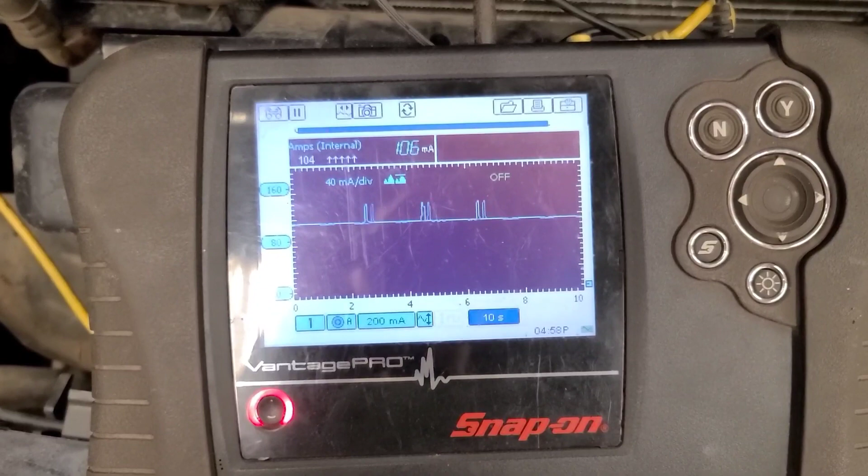So it's the next day. We're back working on this 2012 F150 for a parasitic draw. In the previous video, I found a broken wire between the door and the pillar, keeping the interior lights on, but that shouldn't have killed the battery because the BCM should shut down the interior lights after 15 minutes. Then the draw dropped about 2.5 amps. I found the two sun visor mirror lights on because of broken or worn hinges. And then it still dropped down to about 2.2 amps.

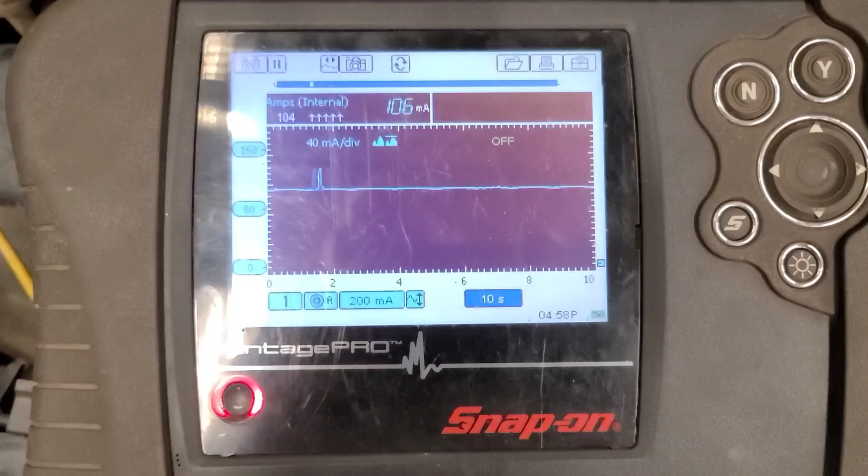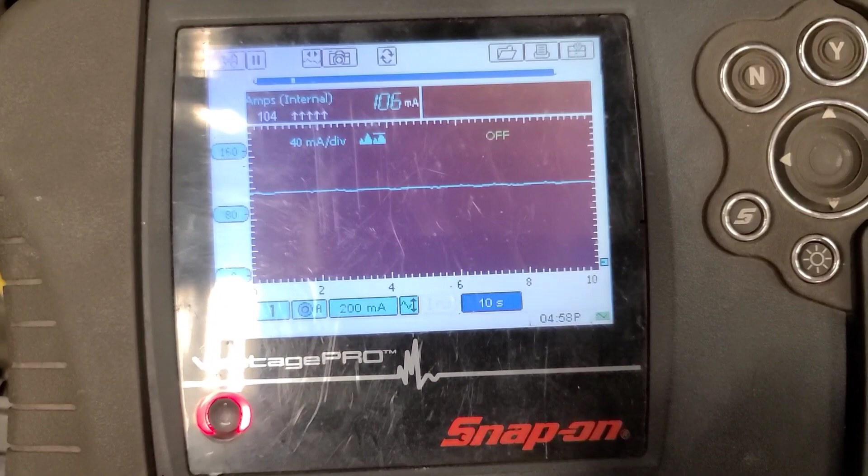And then I was playing with it, pulling fuses, and it dropped to 106 milliamps, and it's been 106 milliamps. But you can see over the course of the night, because it's been recording since yesterday at 8 p.m., the current draw exceeded 200 milliamps, because that's what the arrows indicate. 104 minimum and maximum overload.

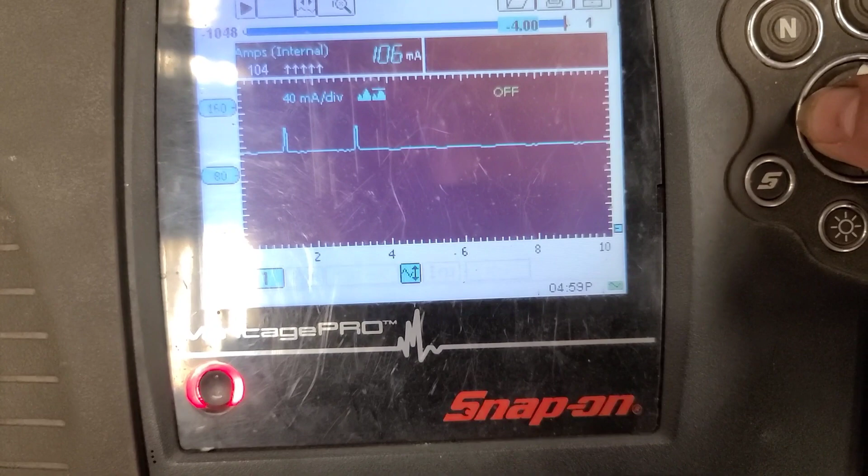Now, I don't think this recording would have caught anything. I'll back up in the recording and look. So we're looking at the record on this thing, and I was doing some research last night.

I noticed that one of the codes that I kind of passed over on the initial scan yesterday was this B1277-15, reverse lamp circuit short to battery or open. I thought, well, maybe it has a bad bulb or something back there.

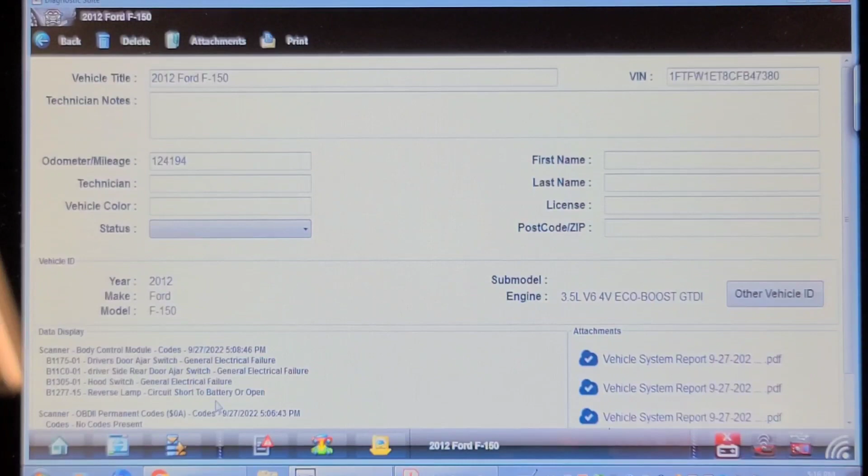I went on Identifix and I did a keyword search for battery drain, and I come across a couple of cases. Where is it here? Okay, battery drain.

Connector 405. Vehicle has a battery drain that will deplete the battery overnight, such that the engine will not crank. The PRNDL is showing proper transmission, shift lever in all ranges, including park. Connect the DVM to fuse 53 at the battery junction, and then remove fuse 34 of the body control module to determine if the voltage on fuse 53 drops.

So I'm going to do this. The bottom line is corrosion in connector 405. Clean connector 405, which is at the back of the truck, causes a bleed of voltage from one of the electrical circuits in there, and of course the BCM controls all the tail lights, including the backup lights, and somehow that bleeding voltage bleeds from a hot-at-all-times circuit to the violet-brown wire.

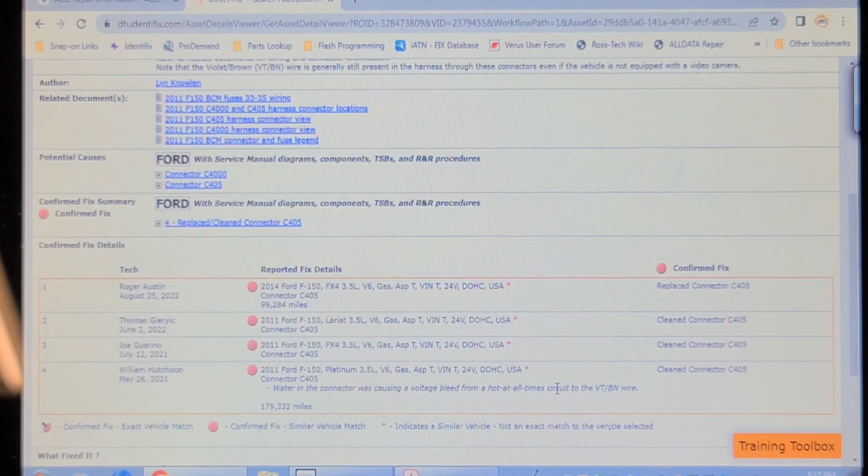So I'm going to look at this circuit and try and establish whether that's a problem. We're going to look at connector 405, which is right by the rear bumper, and considering this thing is in northern Ontario where we have lots of salt and corrosion, there's a very plausible possibility here.

So we're looking under the back of the truck. That's connector 405 that you see there up on top of the frame rail cross member beside the left side of the spare tire at the very back. And it's clipped to the body of the truck. But I think I'm going to try a couple of electrical tests before I go and try and pull that connector apart.

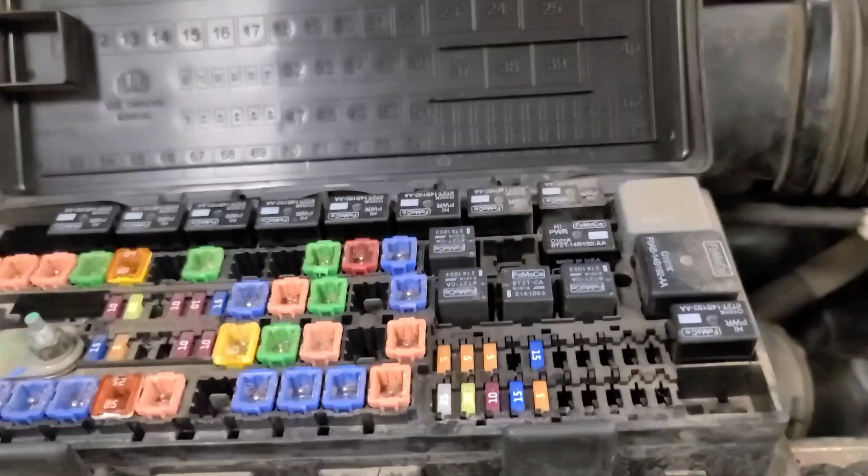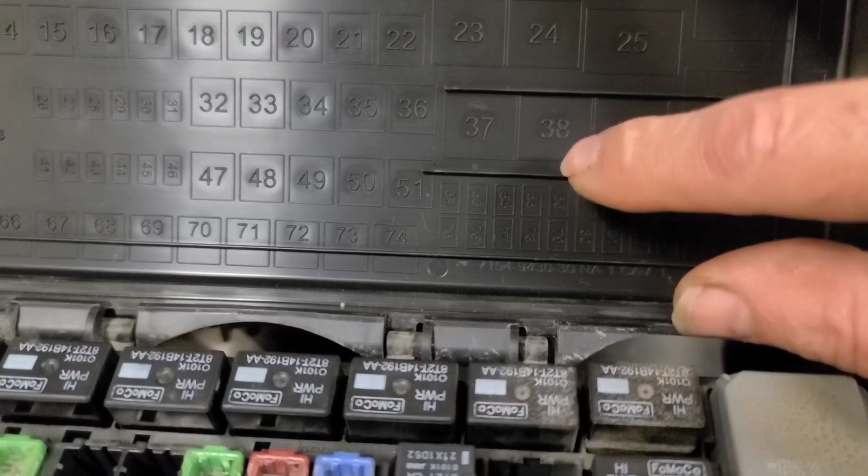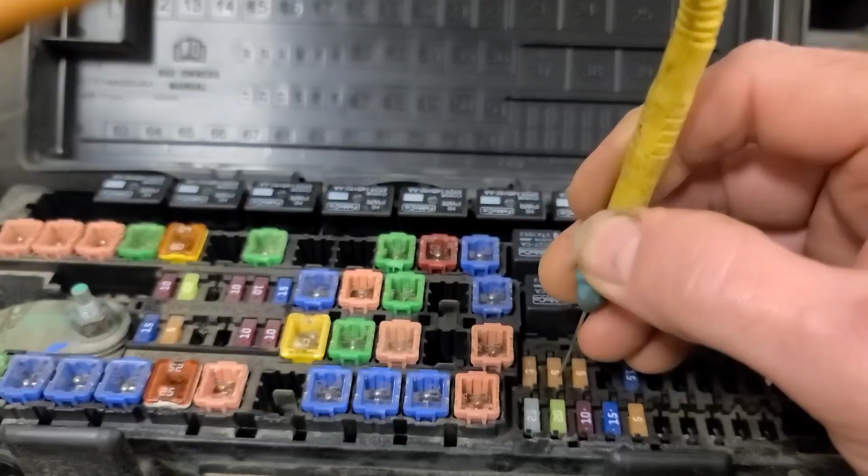So the technician instructions say, before extensive testing is performed, connect the DVOM to fuse 53 of the BJB, which is the battery junction box right here. Fuse 53 is this one right here, 52-53. So that is this second 5 amp fuse right here. And I'm reading 3.143 volts on it.

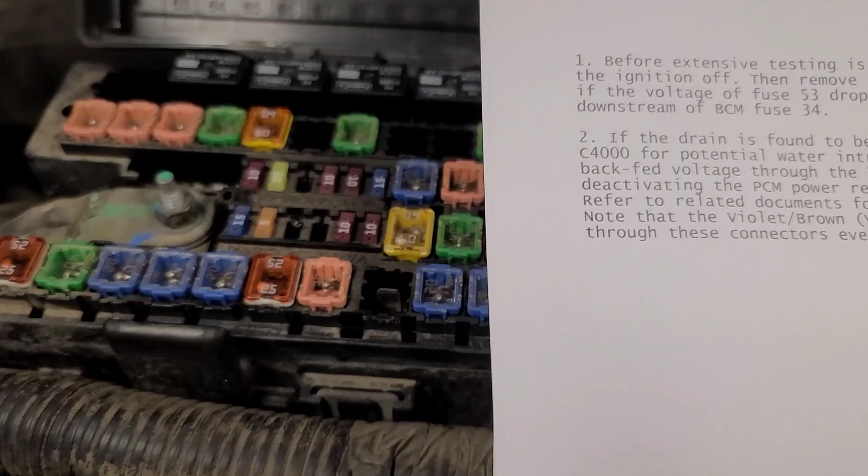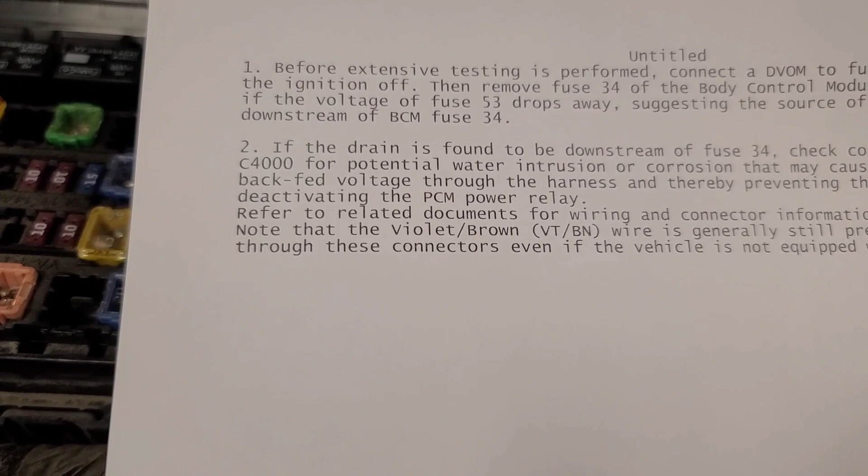So it says, with the ignition off, which it is, removing fuse 34 of the body control module determines if the voltage on fuse 53 drops away, suggesting the source of the drain is downstream of fuse 54 or 34. So let's remove fuse 34 from the BCM.

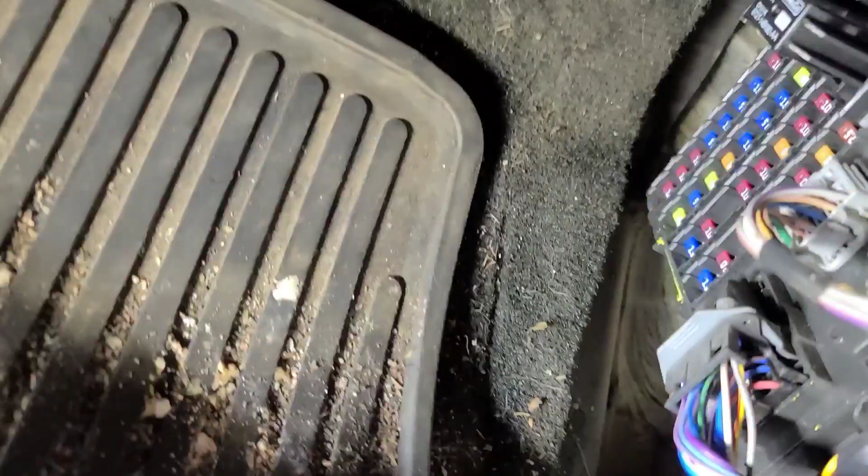So fuse 34 on the smart junction box, or the BCM, is this one right here. So it's 1, 2, 3, 4, 5, 6 up from the bottom. Is that fuse even live? I hope I'm on the right fuse. I don't think that fuse is even live.

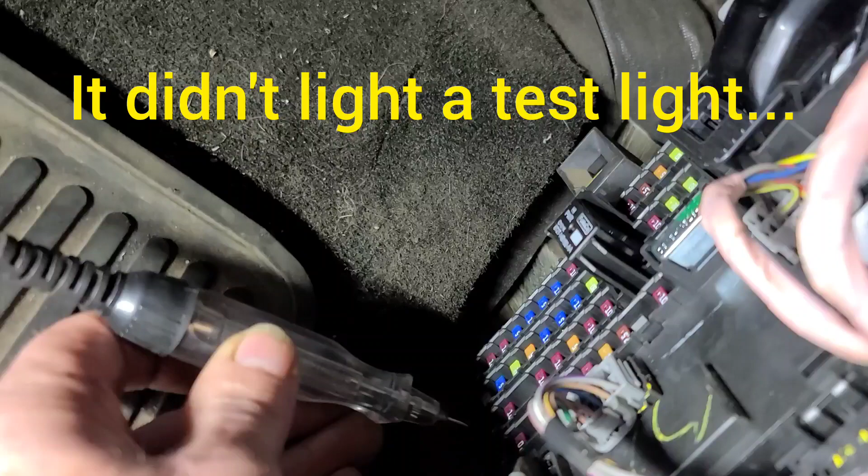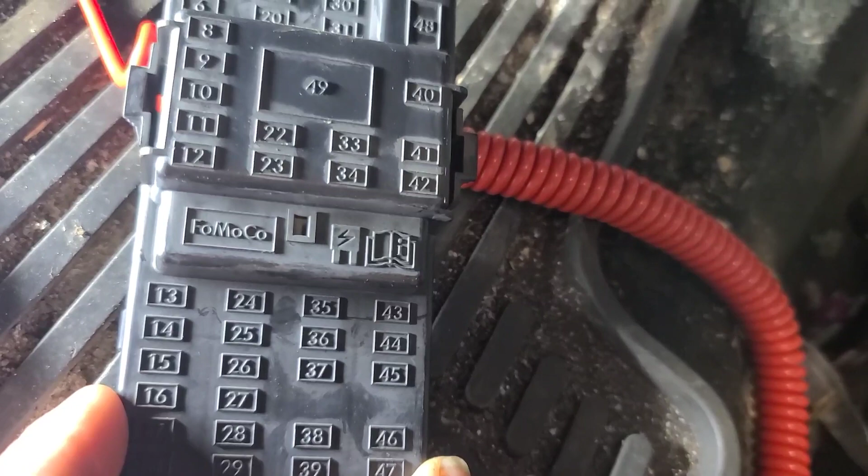That one is. So 1, 2, 3, 4, 5, 6. Let's double check that. One, 2, 3, 4, 5, 6. The second row. They're not numbered on the junction box, but that fuse is not even live.

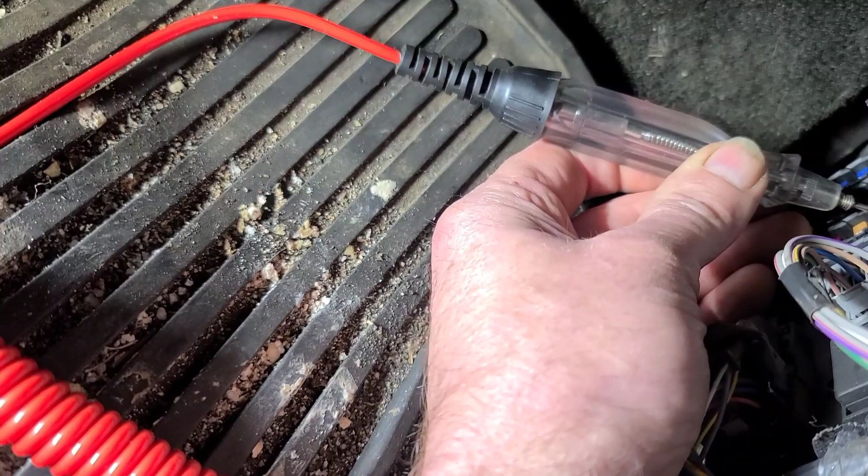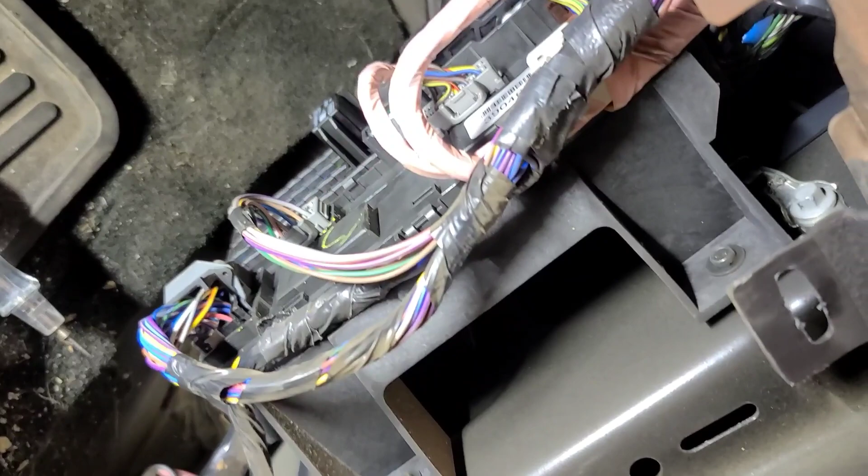But that doesn't mean there's no voltage there. It doesn't light a test light. 1, 2, 3, 4, 5, 6. So that's the second 10 amp fuse. I need a pair of needle nose pliers. So there's the fuse out of that location. Let's go check and see if we still have voltage on that wire, or on that fuse.

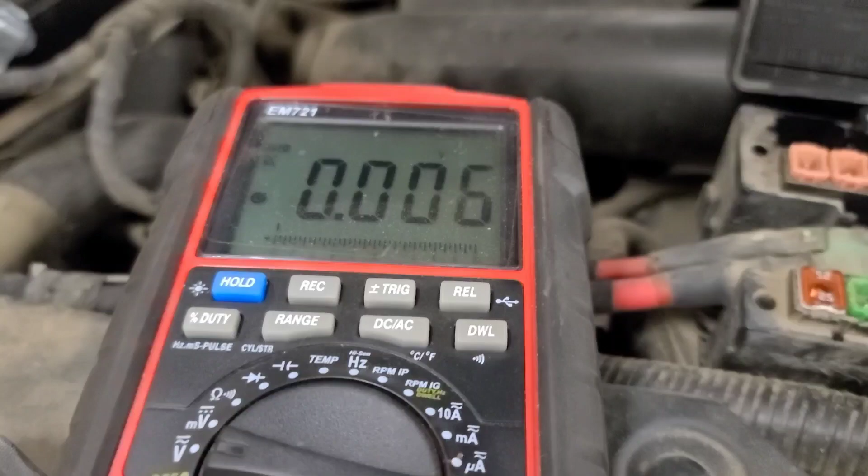53, fuse 53. Survey says... look at that, 0 volts. So what does that suggest now?

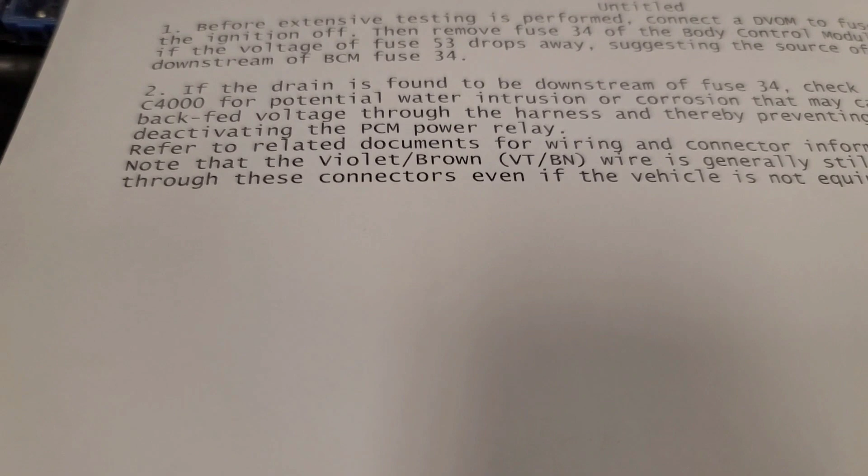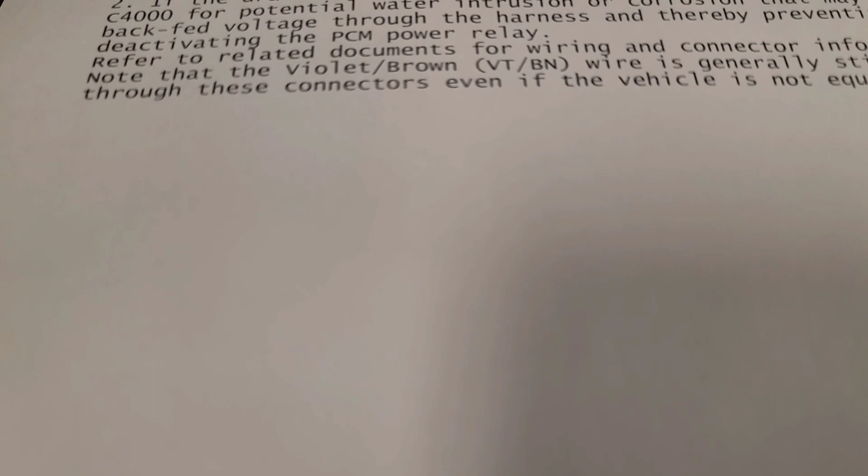If the voltage drops away, that suggests the source of the drain is downstream of BCM fuse 34. If the drain is found downstream of fuse 34, check connector 405 and C4000 for potential water intrusion or corrosion that may cause backfed voltage from the harness, preventing the PCM from properly deactivating the PCM power relay.

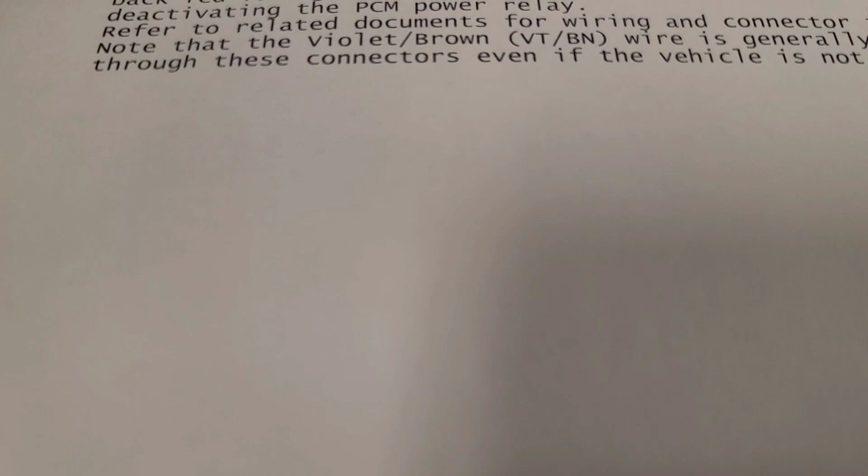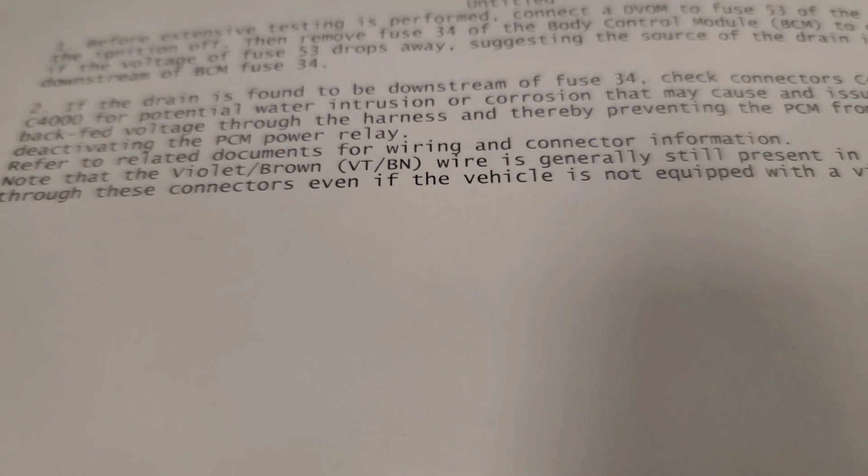Refer to related documents for wiring and connector information. Note the violet brown wire is generally still present in the vehicle through these connectors, even if the vehicle is not equipped with a video camera.

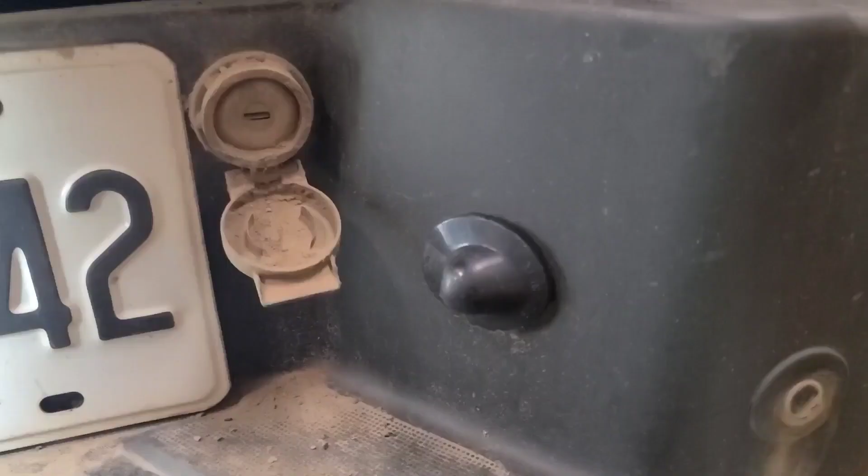Interesting. Let's get at that connector. So I have to drop the spare tire, and this little cap over the spare tire lock was hanging down. So as you can imagine, it's damn well seized, of course.

Oh well, spray some penetrating fluid in there, see if we can get it working.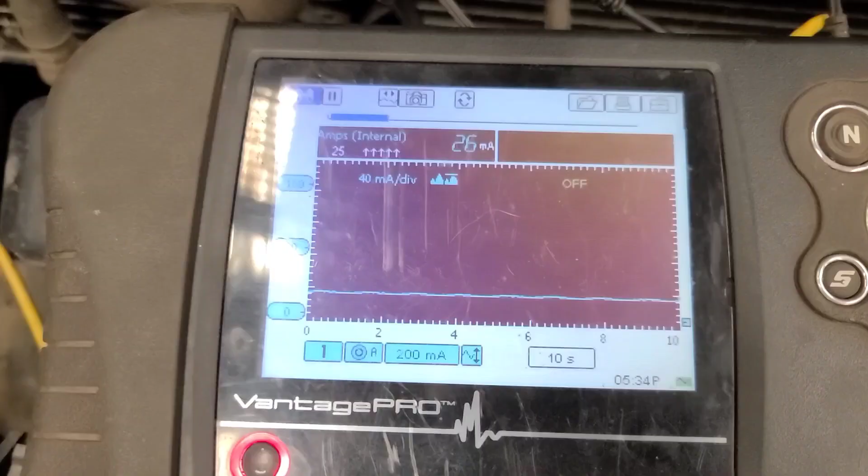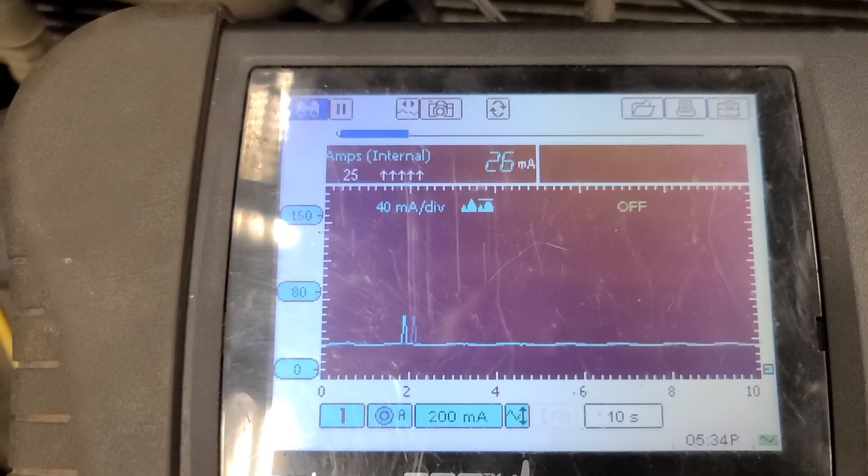So with that fuse 34 removed from the BCM, which by the way had no voltage drop across it when I measured it yesterday, the current draw has dropped to 26 milliamps, which is perfectly acceptable. I want to see what that fuse feeds.

I can't get that spare tire retainer down. So fuse 34 in the BCM

feeds the parking aid module and a video camera, and this is for a SVT Raptor, which this is not, and that goes through connector 212, 1581, 405, 4005. So it could be any one of these connectors.

But I bet you if we measured the voltage at that fuse, I'm sure that's hot in start. So if it back feeds voltage back through that fuse, it back feeds up to this circuit, hot in start power distribution. So that should theoretically be back feeding the heated seat module as well.

And hill descent control switch if it has it. No, that's on the Raptor.

I have a mindset to leave that fuse out. It doesn't appear to operate anything but the parking aid module and the camera. But I got to get that spare tire down to look in that connector.

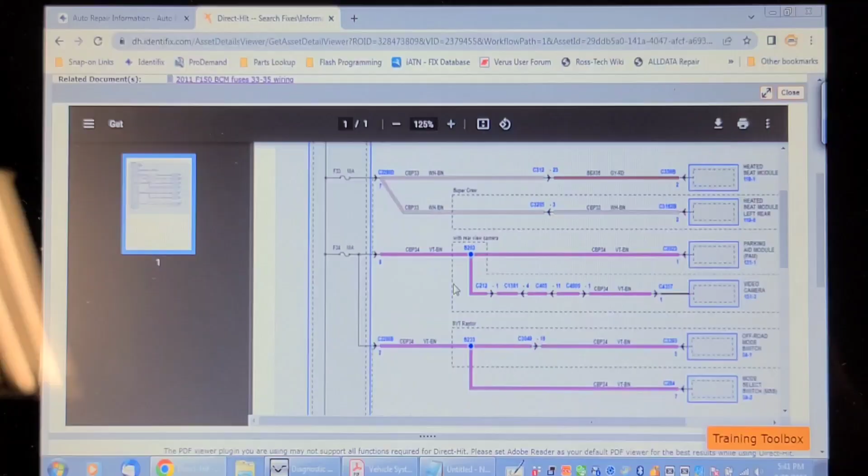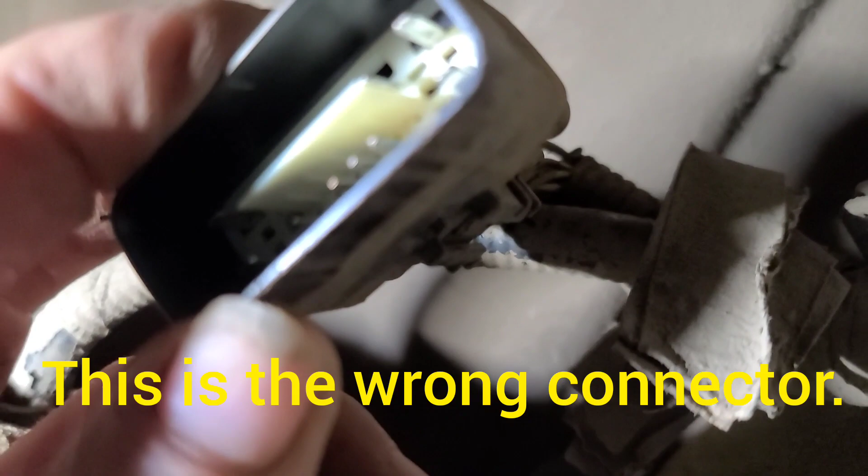So I got the lock pried out of the plastic bumper cover, used a 3/8 long extension to drop the spare tire. Fortunately it dropped, and I got that connector disconnected. Looking at that connector, it looks pristine - no signs of corrosion or moisture entry in that connector whatsoever.

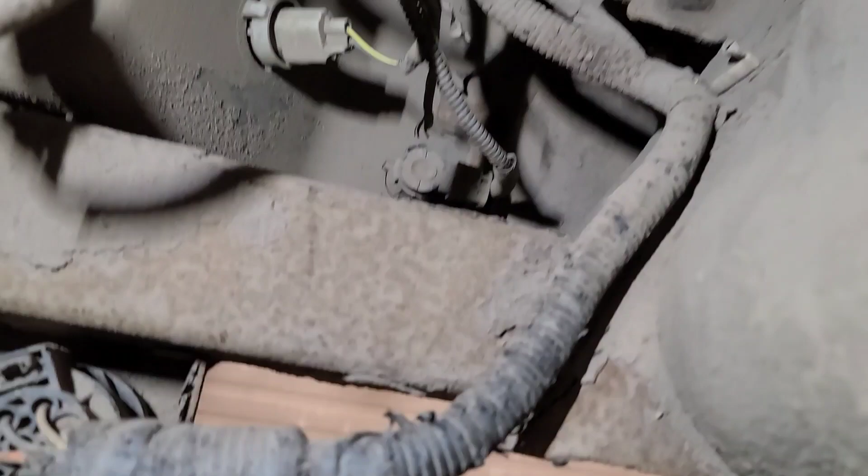So, yeah, there's battery power to this thing. Well, that'll be telemarketers because nobody calls me on that number.

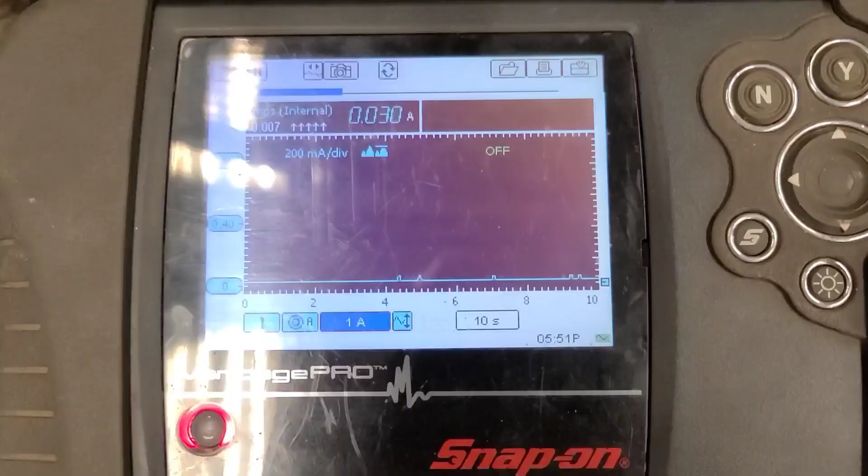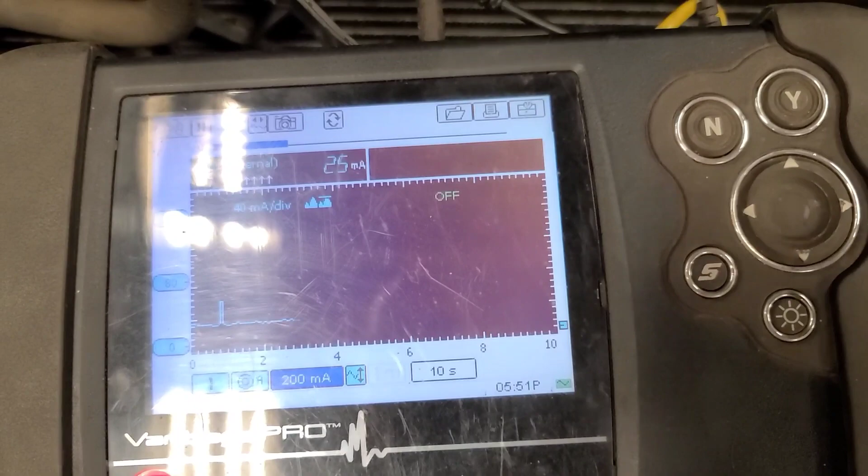So we're back down to 25 milliamps. And I'm going to put fuse 34 back in the BCM.

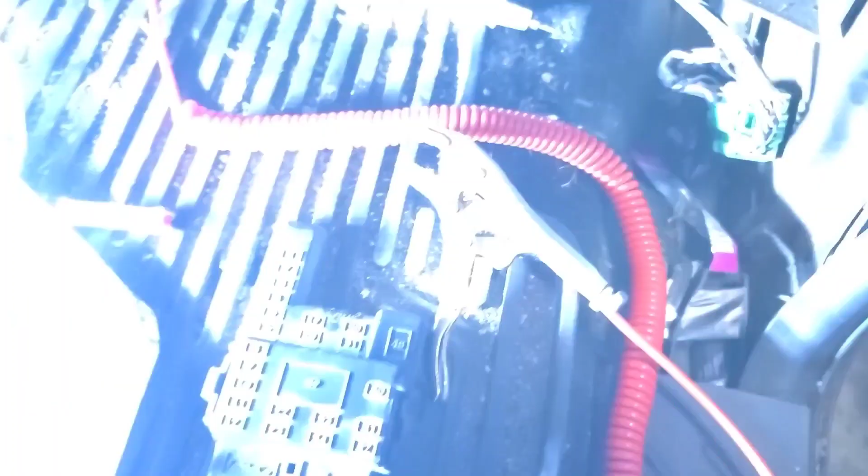Okay, fuse 34 is the second one in the middle, right here.

Let's see if my voltage came back, or if my parasitic draw came back. 105 milliamps.

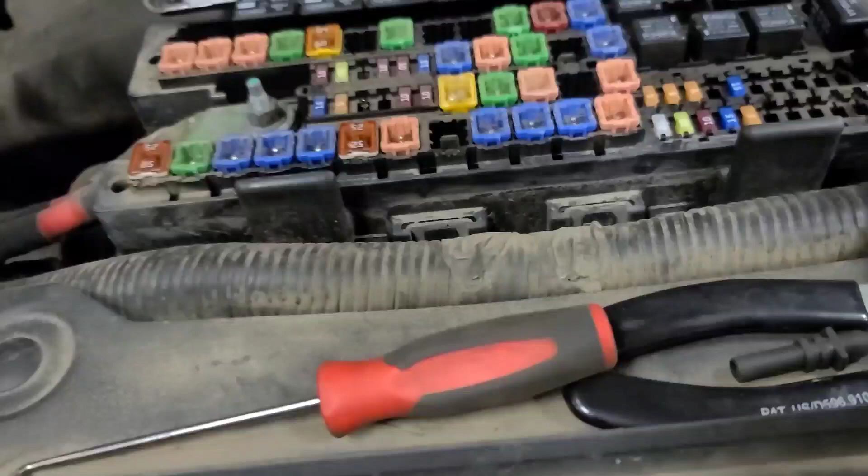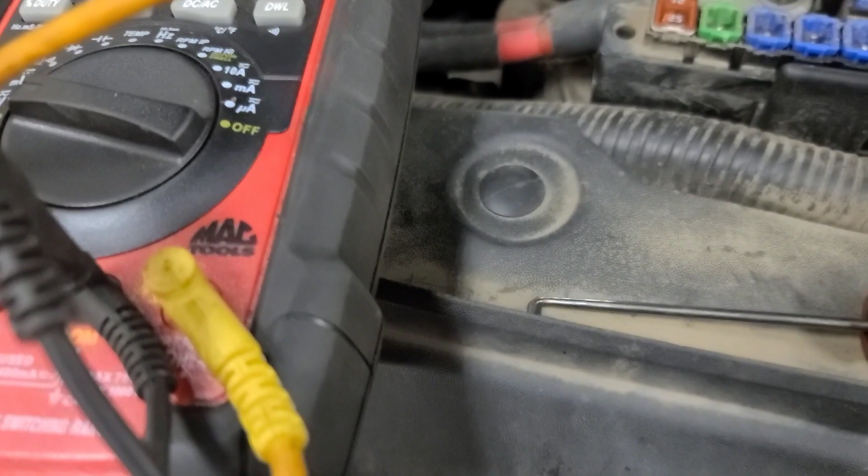And if I got a voltage on this fuse 34 again... 3 volts. So it's obviously not from that connector because I got it unplugged, unless there's salt water in the harness side of that connector.

So let's have a look at the electrical diagram. So we have several connectors: 212, 1581, 405, 4008. 4008 is on the way to the video camera, so let's put it at 1581.

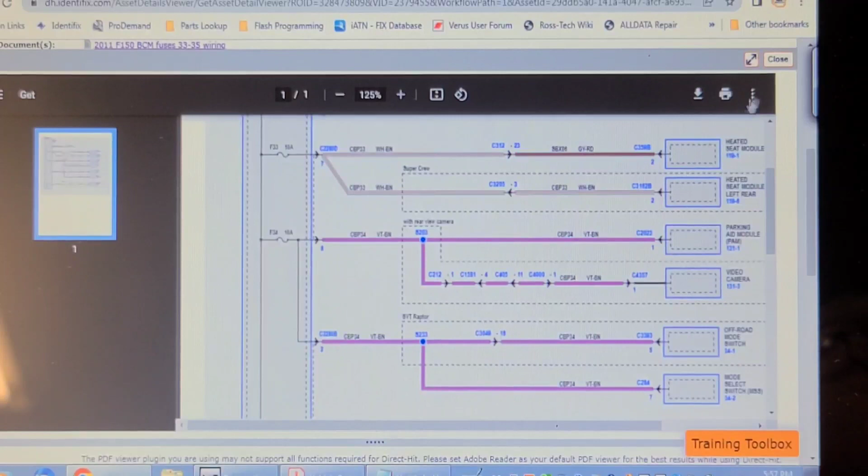This hyperlink doesn't work? Oh, that's a print. What diagram is this? F33, F34, F35. I got to get a version of this diagram because these hyperlinks don't work. So here is the version of the schematic.

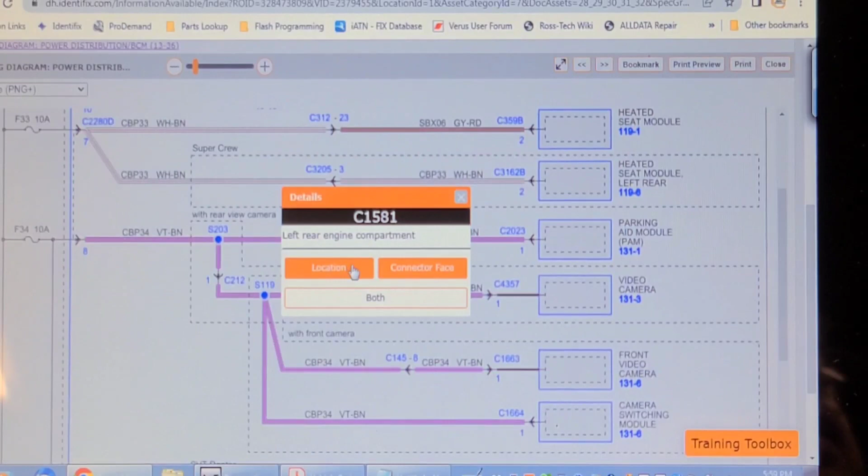So we're at 405. Let's try connector 1581. Where is that located? Should be under the chassis of the vehicle.

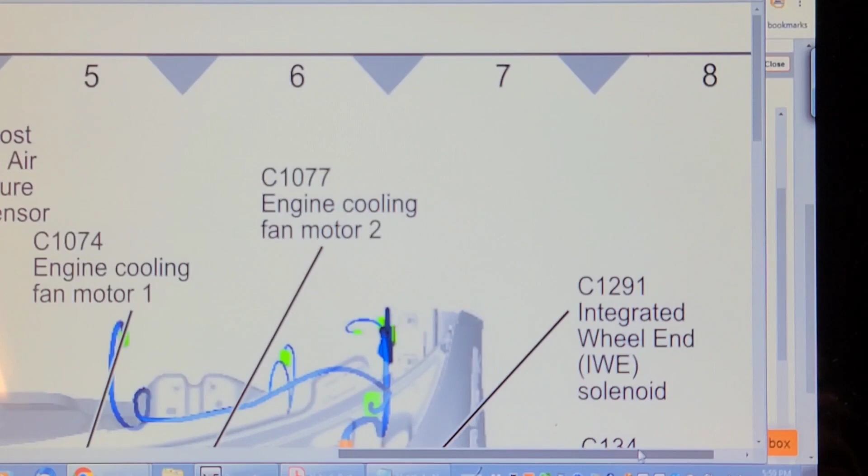Really? Why would it be over there? Well... how many pins in that connector?

That looks like a pretty big connector. Well, yes, it is. And there's nothing downstream between there and 405?

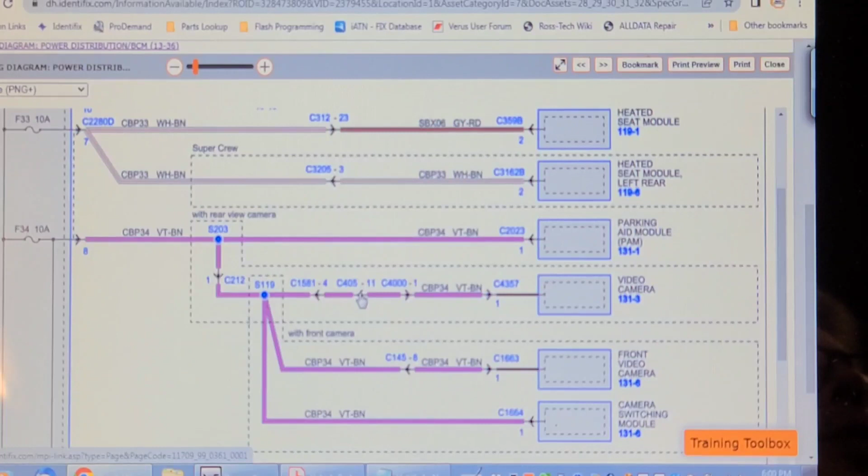So we should go to connector 405, pin 11, this violet wire, and measure the voltage on it and see if we got a voltage at that connector under the truck. Well, that's connector 405.

And that's not the connector I have apart. The connector I have apart is different from that one. So there's another connector up there. Let's see that 405 where it exists.

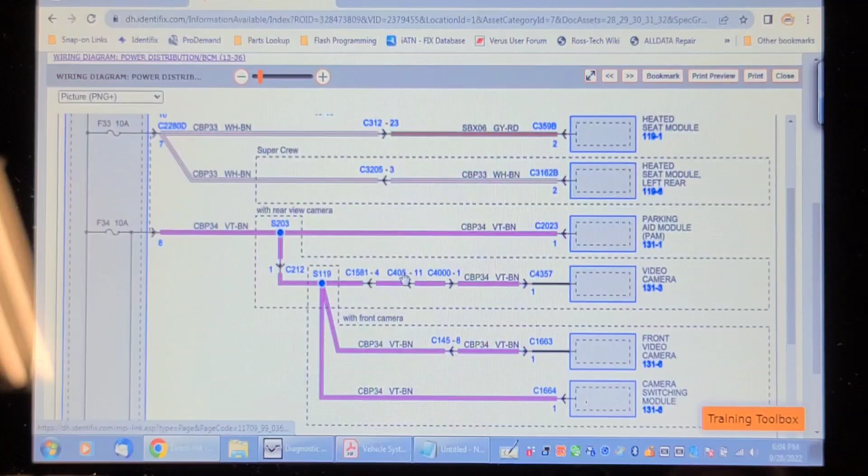Location - I know it was at the back of the vehicle, but the diagram is pretty vague. So that would explain why it's not affecting anything by disconnecting it, because I think I'm on the wrong connector. Come on, load the picture.

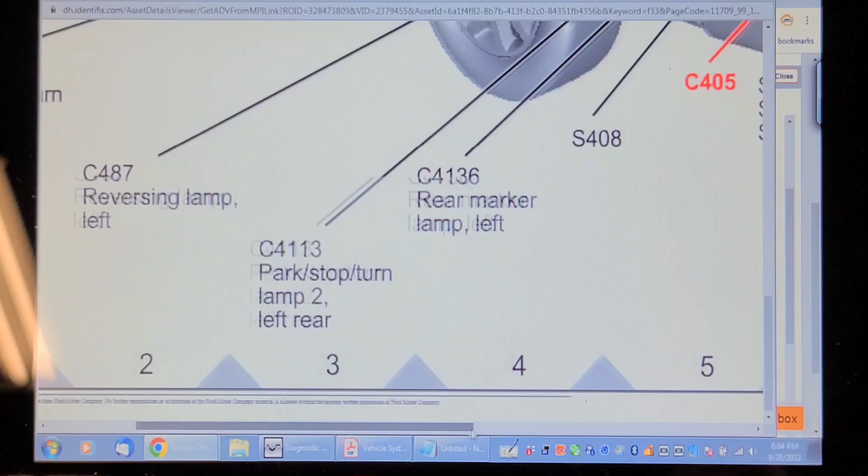See, there's a bunch of connectors there. So I think I'm on this connector here, and I need to be on this connector. Alright, let's get a picture of that connector face again.

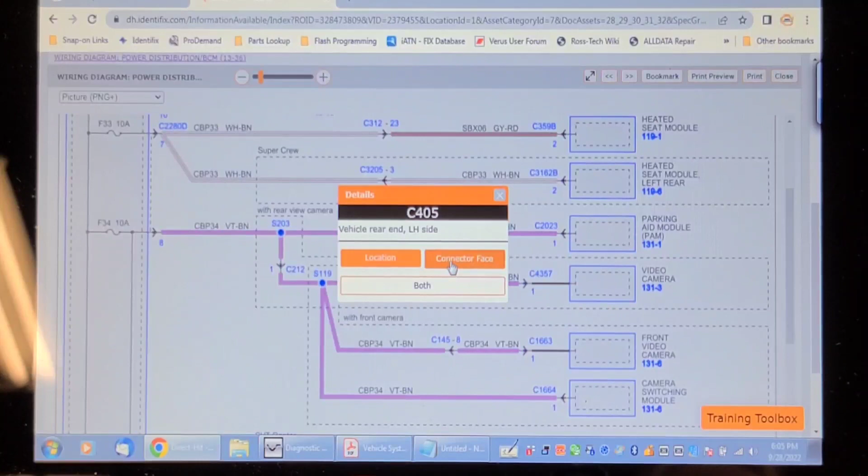So it's a 16-pin connector, rectangular, and the color of the connector is black. Well, that narrows it down.

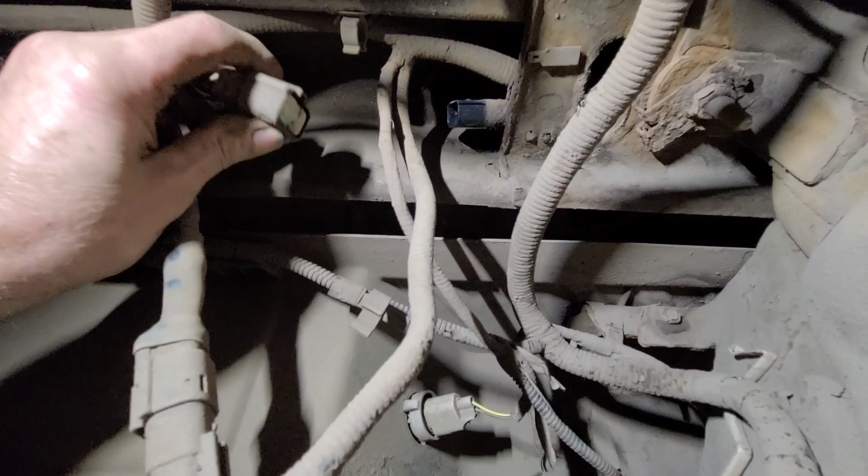So it turns out there's another connector right here. And I've disconnected that, and it's full of water. Imagine that.

Damn. Pin 11 is this violet wire right here. This purple wire, the second one in.

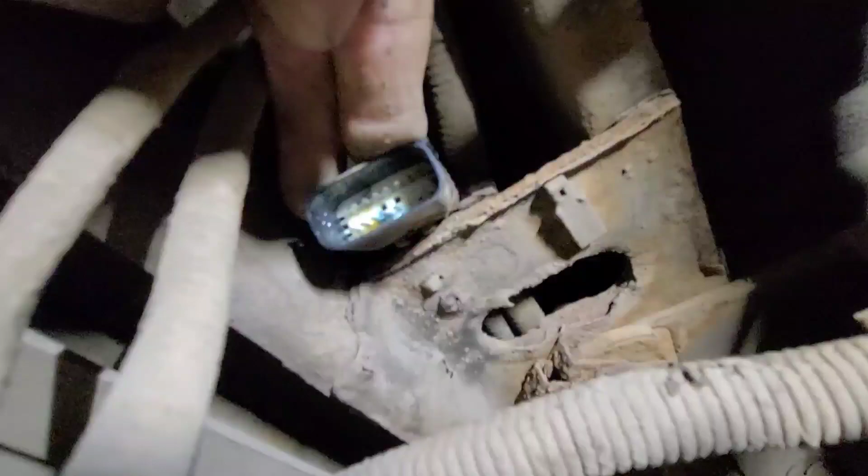Green corrosion. Well, let's get some air pressure and blow this out and dry it out and deoxidize it. So I got both fuses back in, or the fuse in the BCM back in. Got that connector blown out, deoxidized with deoxide spray, and packed full of dielectric grease.

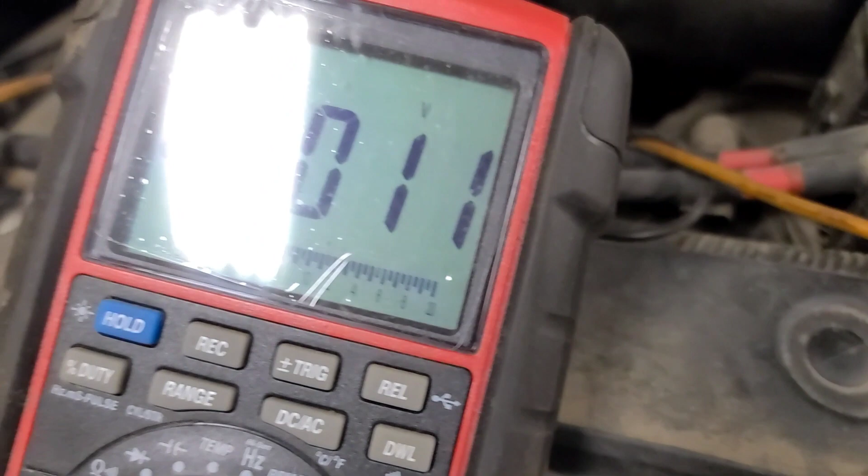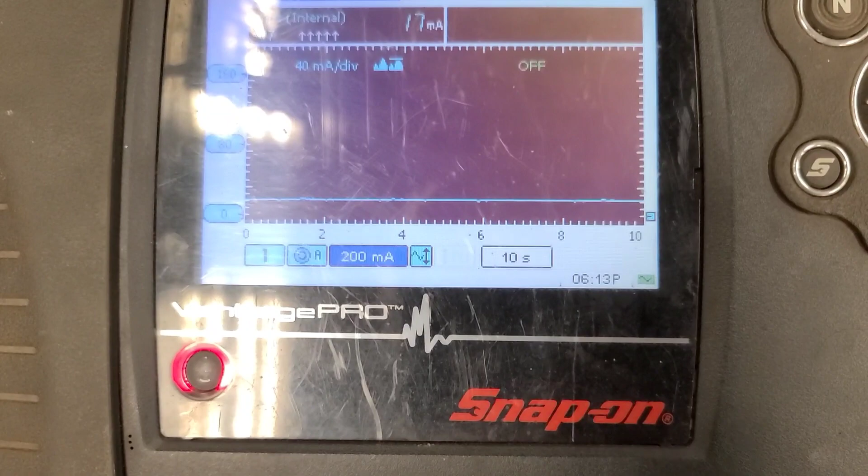Now we have 0.011 volts on that fuse, and the draw now is 17 milliamps. So that appears to be it. I'm going to put this all back together again and check it one more time for a parasitic draw.

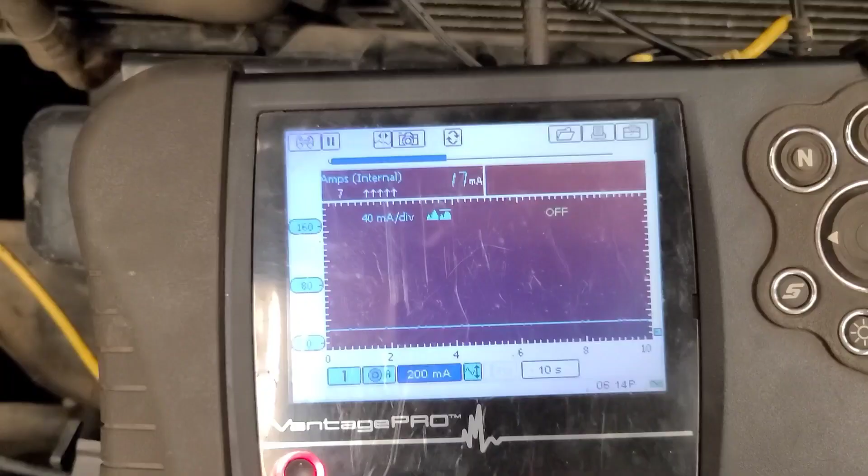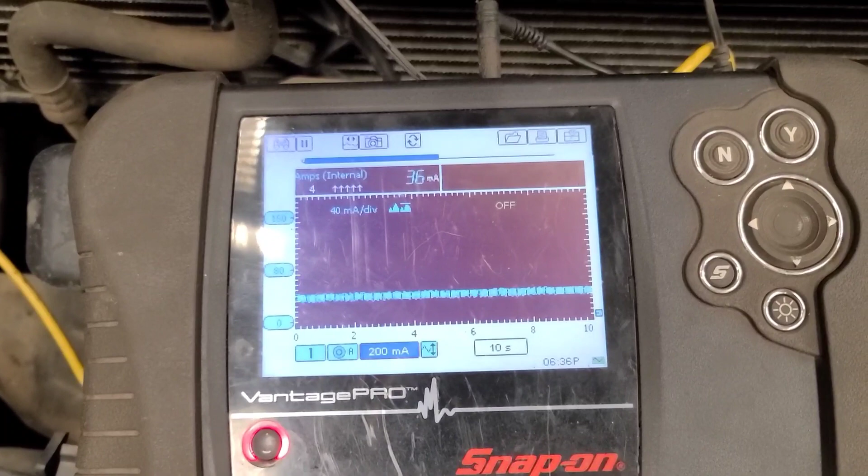Okay, so now I put the car starter back in and all of the electrical back together as original, and we're reading 36 milliamps, which is acceptable. It was down to around 17 to 20, but that car starter module does draw a little bit.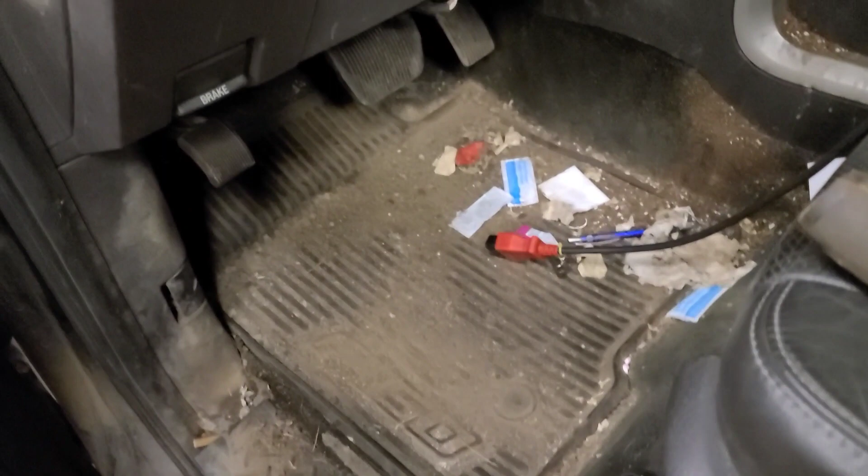I'm curious, I want to plug in the DLC connector and see if we have communication with any modules now. So I've got the key out of the ignition. I got the DLC connector plugged into the VCMI for this Ford F-150, and we're going to do a code scan and see if anything reports. I don't have the key on, but I was communicating with a whole bunch of computers before with the key off.

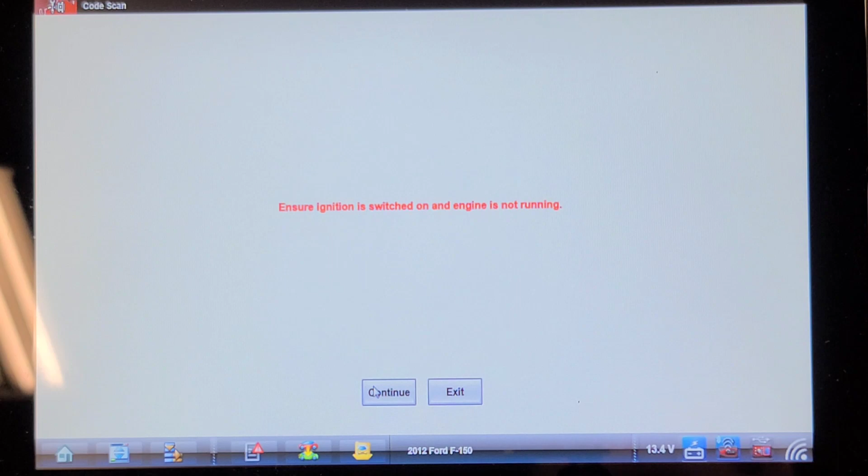There was like 6 or 7 computers. Still got communication with the steering column control module. So I guess initializing communication with the scan tool wakes it up. I wonder if that wakes up the current flow.

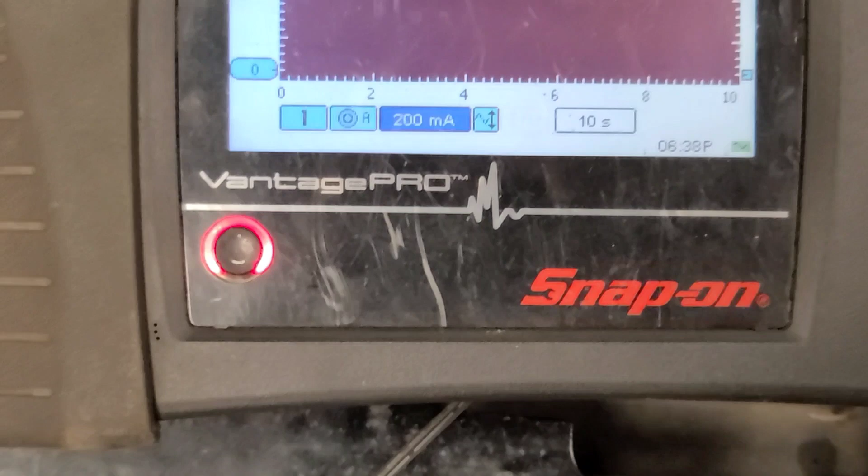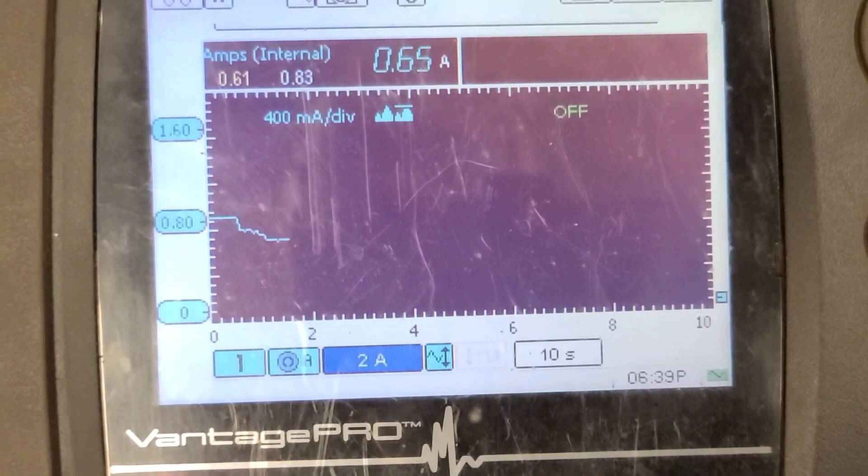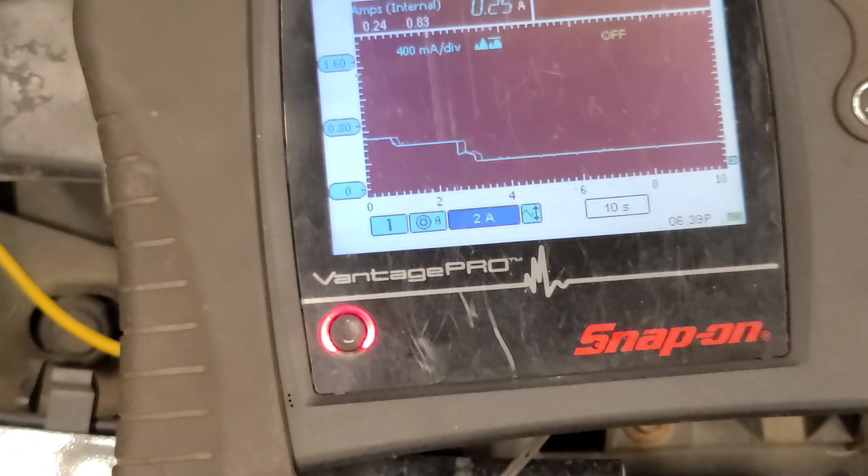Certainly does. 650 milliamps, 500 milliamps, 300, 250. So the fact that I still had communication with the BCM with the key off is irrelevant at this point, because you can see there's a bunch of modules that will communicate if asked to, by the looks of it. So we're going to start this vehicle up and do a network code scan again.

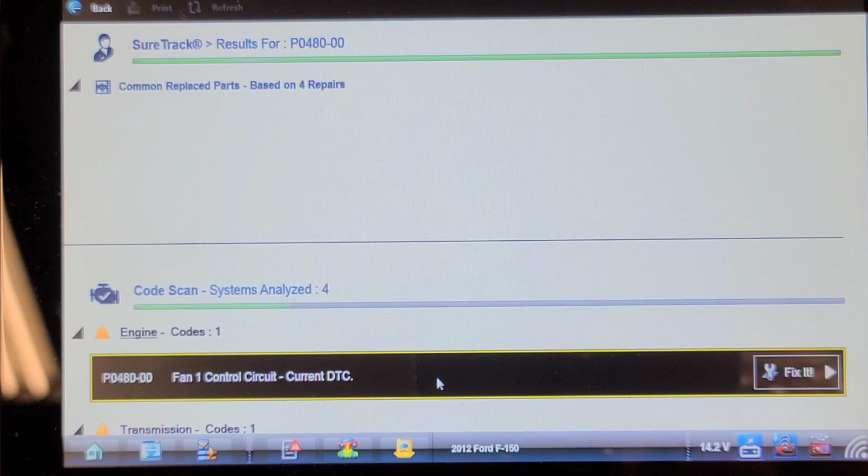So I've got the vehicle running. Let's do a code scan again. It says not running, but I know I can do it running. So there's a problem with the engine cooling fan. We had that code before, P0480.

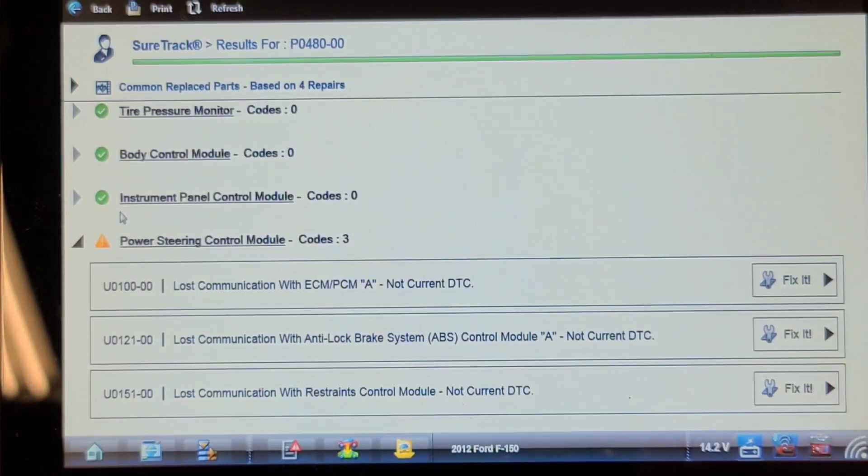Still got these lost communication codes with the ECM, PCM, and the power steering control module, but those could be from the power problem we had before. A hell of a lot less codes though. So let's go back and clear the codes.

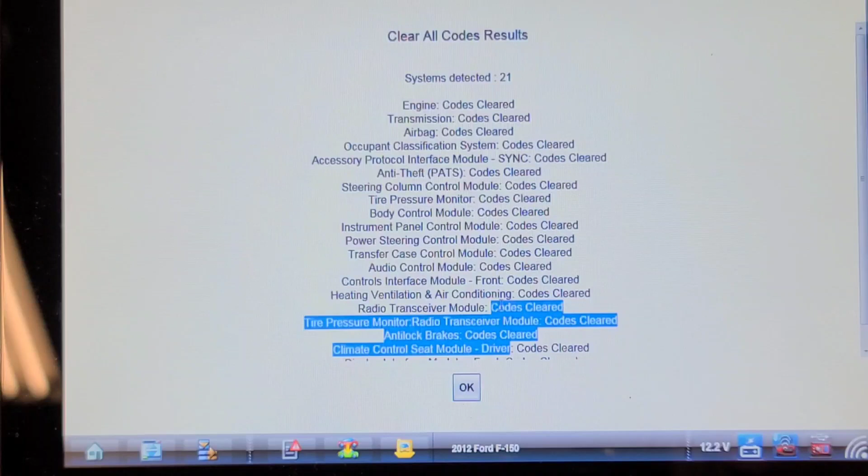Switch the ignition off, we're going to clear all the codes one more time. So if you run across this problem, pull fuse 34 in the BCM. If that makes everything go to sleep, then check connector 405 for water intrusion. Code's cleared. Okay, switch ignition off.

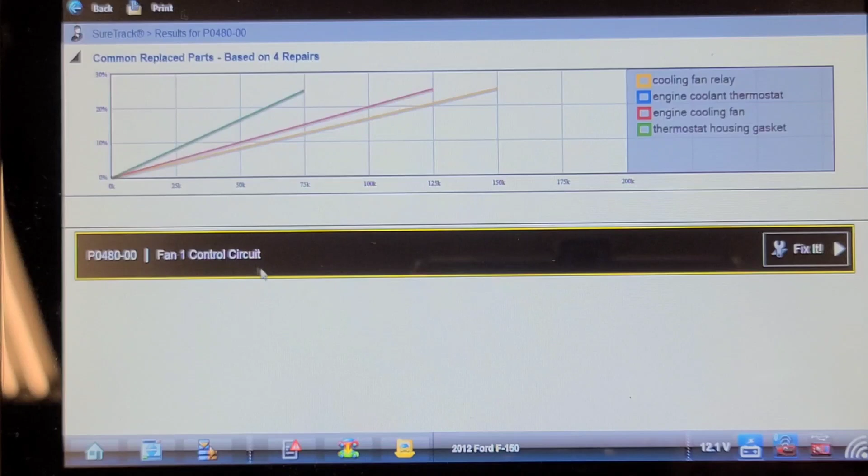Let's do a key on engine off self-test of the ECM, see if it resets that fan code. Normally it would run the cooling fan. One fan run. Fan control circuit 1. P0480 00. Well, I'll discuss that problem with the customer.

Let's see what the troubleshooter says about the P0480 00. For a relay controlled electric cooling fan, it monitors a low fan control primary circuit output from the powertrain control module. The test fails when the PCM grounds a low fan control relay circuit and excessive current draw is detected on the low fan control circuit, or when the low fan control circuit is not grounded by the PCM and voltage is not detected on the low fan control circuit. Possible causes are an open or shorted low fan control circuit, open V power circuit to the low speed fan control relay, or a damaged low speed fan control relay.

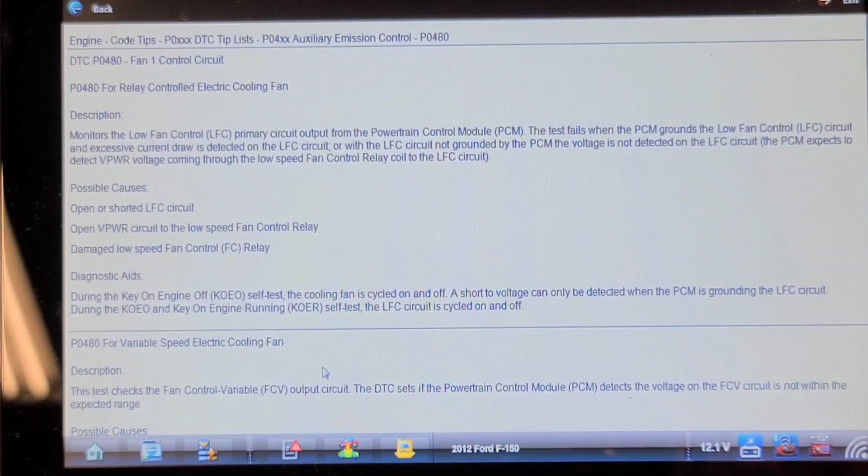During the key on engine off self-test, the cooling fan is cycled on and off. A short to voltage can only be detected when the PCM is grounding the low fan control circuit. During the key on engine off and key on engine running self-test, it's duty cycled. Possible causes: fan control circuit open or shorted, B plus or ground circuit concern to the cooling fan, V power open to the cooling fan, or a damaged cooling fan module.

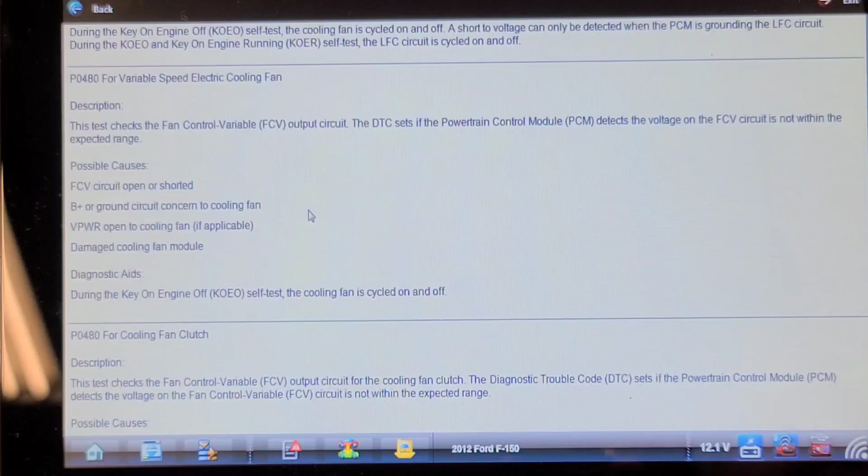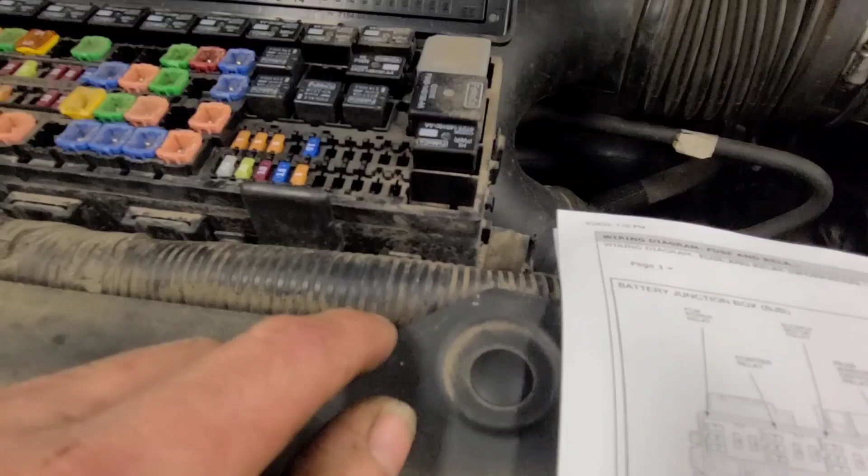Alright, well I'll discuss this with the customer, but for now I'm pretty sure this parasitic draw problem is corrected. So I thought I'd take a couple minutes just to check fuses and relays. This is the low speed cooling fan relay in the bottom right hand corner, and there it is - gone. So I'm not sure what's going on with that, but the relay's missing. I might stick one in there and see what happens. Why not? Well, it worked with a relay jumper in there. So the fan motor's not shorted, so let's plug a relay in and see what happens.

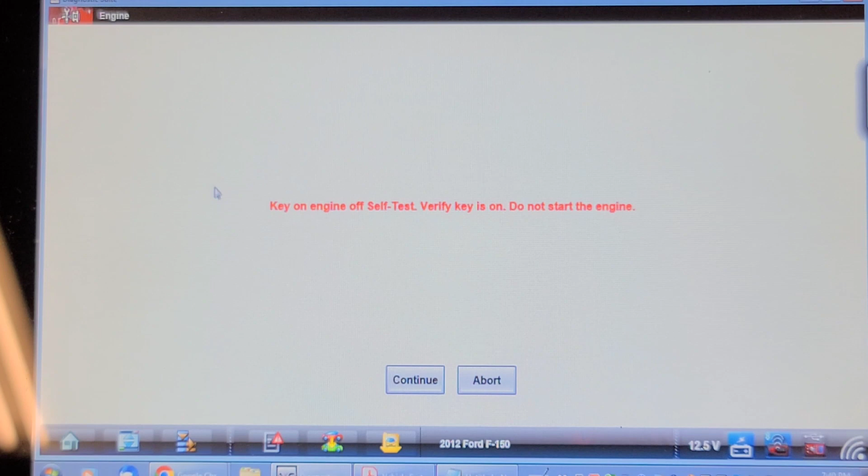So we got that relay installed and cleared all the codes. We're going to do a key on engine off self-test again and see if we can hear the fans run. I don't know what that is. And no codes. So the radiator cooling fan works now.